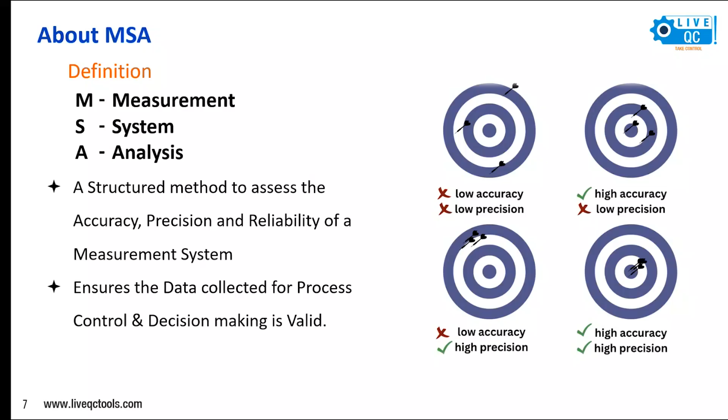MSA. As we all know, it is for accuracy, precision, and reliability of the measurement system regardless of the area of deployment. Now, let us focus on its core purpose, which is dealing with measurement errors, data variation both in process and system, then improving data-driven decisions and quality standards assurance.

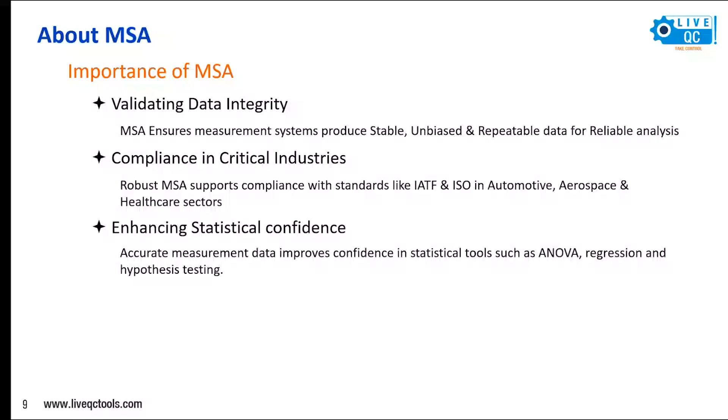It is important to recognize why MSA is so critical across industries, bringing the topmost importance in fields such as validating data integrity and forming a reliable foundation with trustworthy data. Robust MSA supports both audits and regulatory expectations, which also enhances statistical confidence, strengthens the effectiveness of statistical tools such as ANOVA and regression analysis, helping with continuous improvement in achieving long-term excellence.

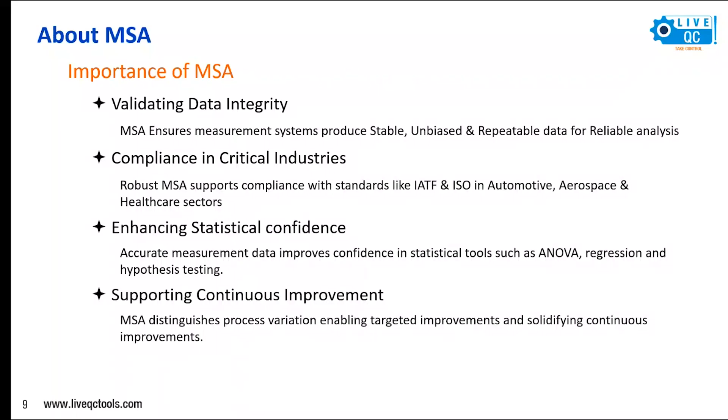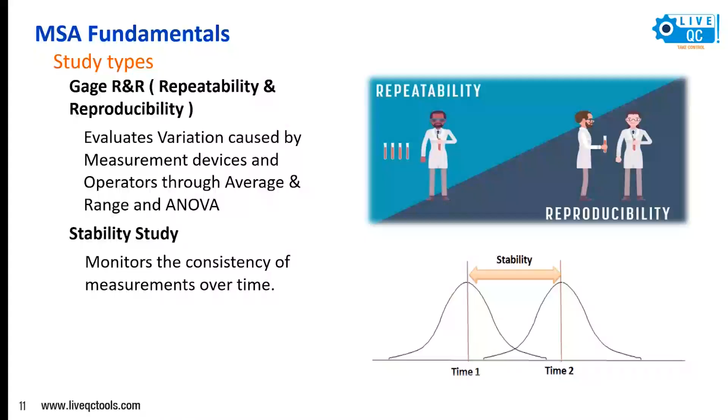Looking here, these are all the common study types, starting from gauge R&R, bias study, linearity study, stability study, and attribute agreement analysis. Let us take a closer look at two critical study types, gauge R&R and stability study. This study is typically performed using average and range methods or ANOVA-based approaches, both of which provide insight into repeatability, reproducibility, and overall measurement system variation. Along with that, stability studies are conducted to monitor the consistency of measurement performance over time.

Followed by that, let's focus on the accuracy related and attribute based studies. This study is bias, in determining whether a system consistently estimates the actual value. Linearity study extends this concept by monitoring bias across the entire operating range of measurements. Attribute agreement analysis is used to evaluate the consistency and accuracy of categorical decisions made by multiple appraisers.

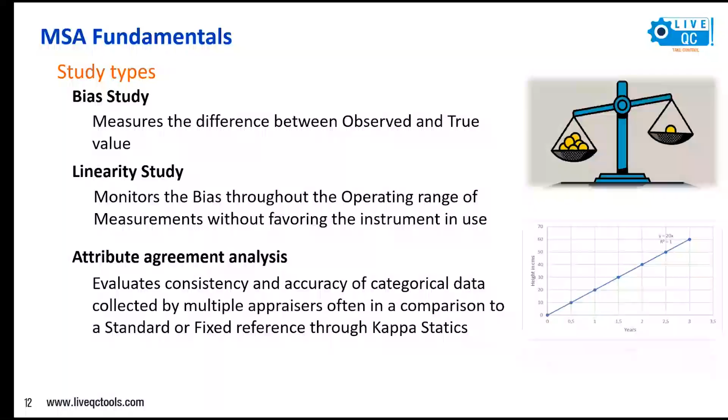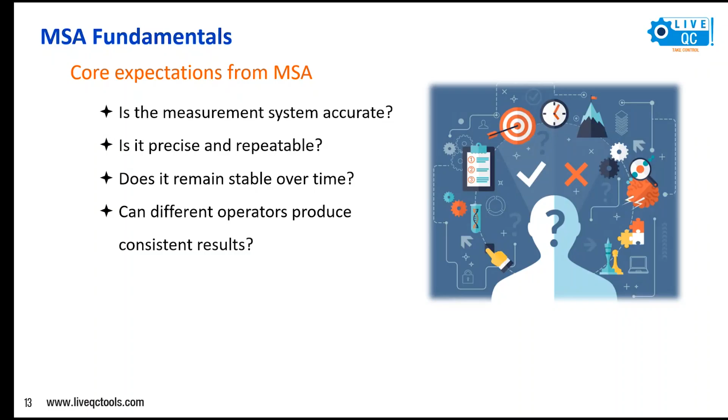The real significance of MSA lies not in the studies themselves, but in the questions they help us answer about our systems. At its core, it answers the accuracy of systems, precision of data, stability over time, and consistency of data. Now, let us see some of the key benefits, starting from reduction in variation, reliability in data, risk mitigation, sustenance of audit standards, cost reduction with increased quality outcomes.

The core deployment areas of MSA, such as the incoming material inspection, where MSA assures the vendors with the quality of product supplied and its compliance of standards. The wide application of process quality control and exit inspection by MSA is to monitor critical dimensions and tolerances like shafts, bearings, and any other in-house materials that are produced. In laboratory testing, MSA validates the precision of equipment used.

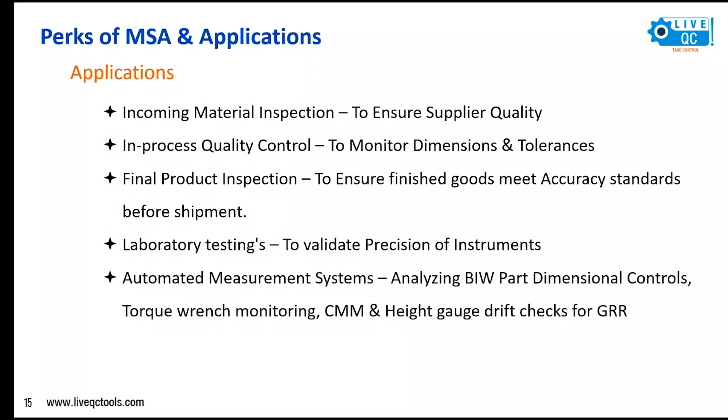MSA plays a critical role in automated measurement systems like drift checks, CMM operations, Poka-yoke data captures, torque wrench monitoring, including gauge R&R evaluations. Having seen how MSA is applied across incoming, in-process, final inspection, and automated measurement systems, let us now dive deeper into one specific application, the use of height gauges in automated measurement environments.

Just imagine a production line measuring a critical component dimension with a tolerance of plus or minus 0.05 mm. The height gauge is used during in-process inspection to ensure the dimension stays within limits. At first glance, measurements appear acceptable, but variation starts to show up in downstream inspection. This is where we break the problem down using ANOVA-based gauge R&R.

The first aspect is the operational aspect, the act of measuring the component using the height gauge. If the measurement itself is inconsistent, then the impact is immediate. Parts may pass inspection on one shift and fail on another. This directly affects product quality, customer satisfaction, scrap rates, and downstream process performance.

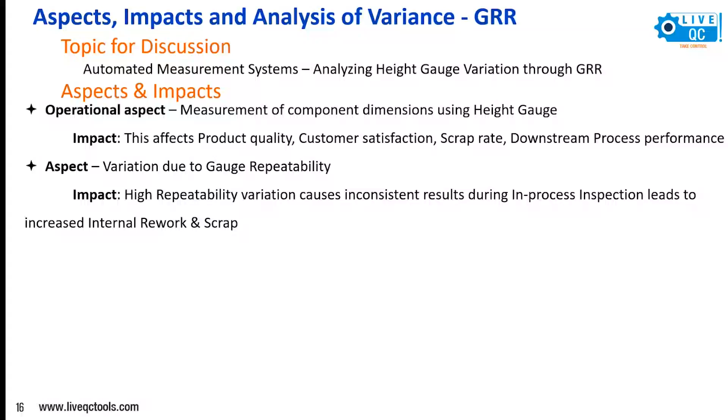ANOVA then reveals repeatability variation, variation coming from the gauge itself. For example, the same operator measures the same part 3 times and gets 10.02 mm, 10.04 mm, and 10.01 mm. The inconsistency leads to unstable in-process inspection response, increasing internal rework and scrap.

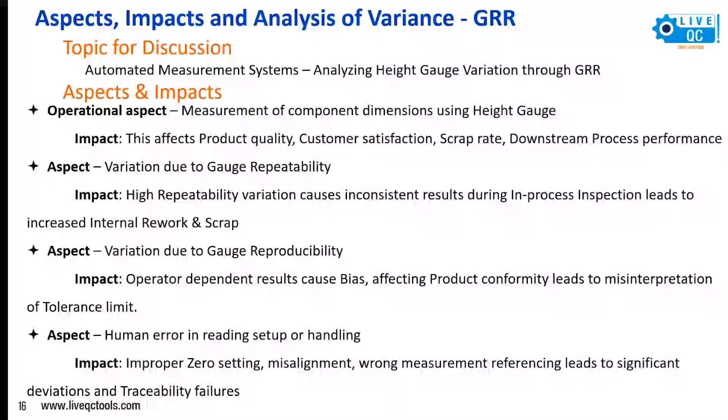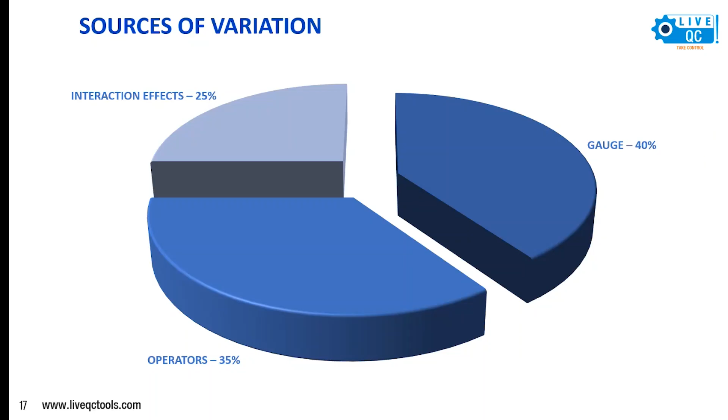Using an ANOVA-based gauge R&R analysis, we can quantify these sources of variation. For instance, 40% from the gauge, 35% from the operators, and 25% from interaction effects, clearly identifying where corrective actions are required. This level of quantitative insight allows organizations to move from observation to targeted data-driven improvements, which naturally leads us to structured problem-solving approaches.

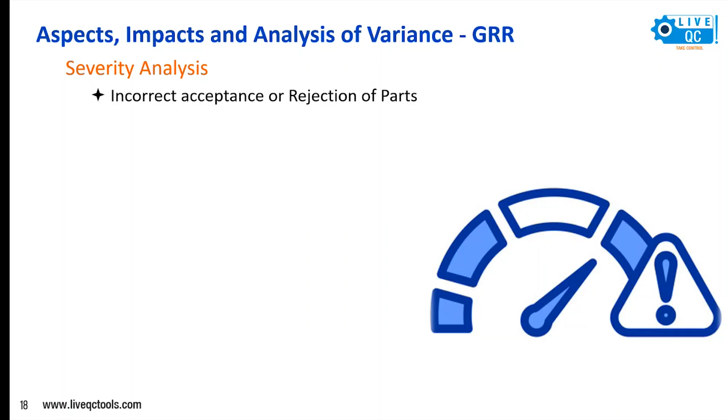Now, let's look at what happens when measurement system issues are not addressed. Imagine a critical component measured close to the upper tolerance limit due to measurement variation. A good part is incorrectly rejected, increasing scrap. At the same time, a borderline bad part is incorrectly accepted, silently moving forward in the process. This measurement error doesn't stop there.

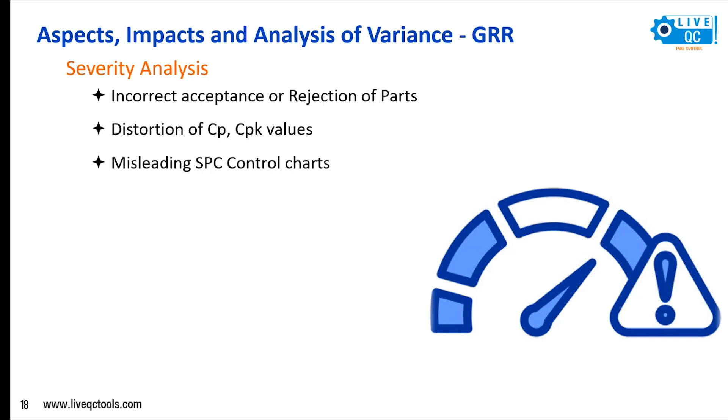When we calculate Cp and Cpk, the variation from the measurement system inflates the numbers, making the process appear either more capable or less capable than it truly is. Decisions based on these distorted values lead to wrong conclusions. The same error flows into SPC control charts, where false alarms or missed signals occur.

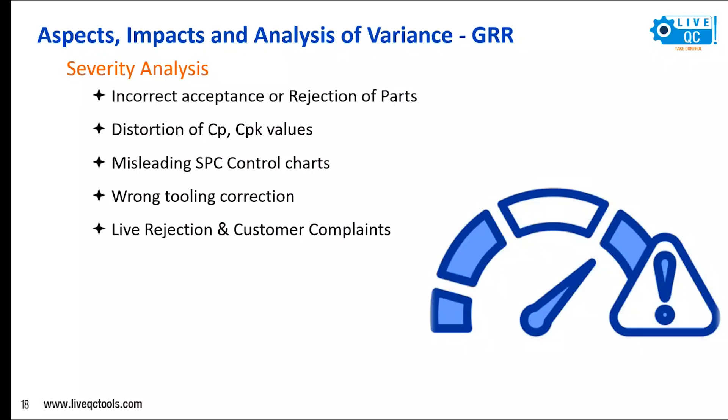Operators may adjust a stable process or, worse, ignore a real shift. Based on this misleading data, teams perform incorrect tooling corrections, chasing a problem that does not actually exist. Ultimately, these issues can escalate into line rejections, customer complaints, and loss of trust, impacting both quality performance and business reputation. Let's now look at how teams arrive at a reliable solution when evaluating height gauge measurement systems.

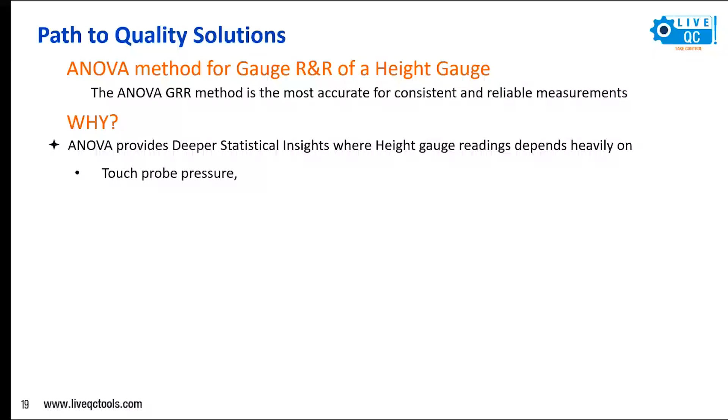Consider a scenario where multiple operators measure the same component using a height gauge. Even though the gauge is calibrated, the result shows unexpected variation. At this point, a basic gauge R&R method provides limited insight. It tells us there is a variation, but not why it exists. This is where the ANOVA-based gauge R&R method becomes essential.

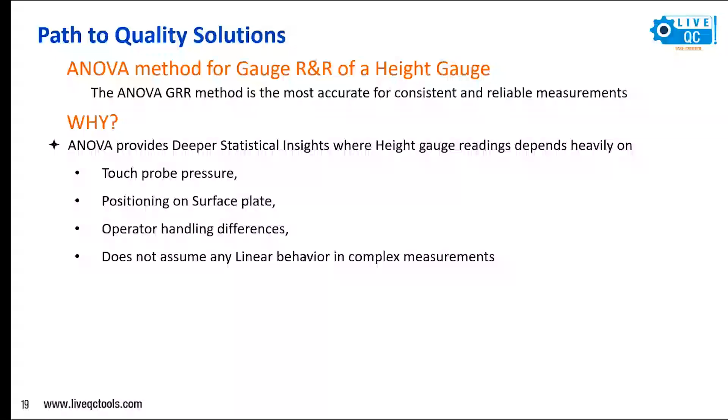Height gauge measurements are influenced by factors such as probe contact pressure, positioning on the surface plate, and operator handling differences. These influences are not always linear and cannot be accurately separated using simpler methods. Now, ANOVA helps us to statistically isolate and quantify variation from the gauge, the operator, and their interaction without assuming a linear behavior.

Because height gauges are highly sensitive instruments, even small differences in handling can significantly impact the results. ANOVA detects these effects clearly, enabling teams to focus on the true sources of variation. As a result, decisions are no longer based on assumptions, but on measured evidence, making ANOVA gauge R&R the preferred method for height gauge studies.

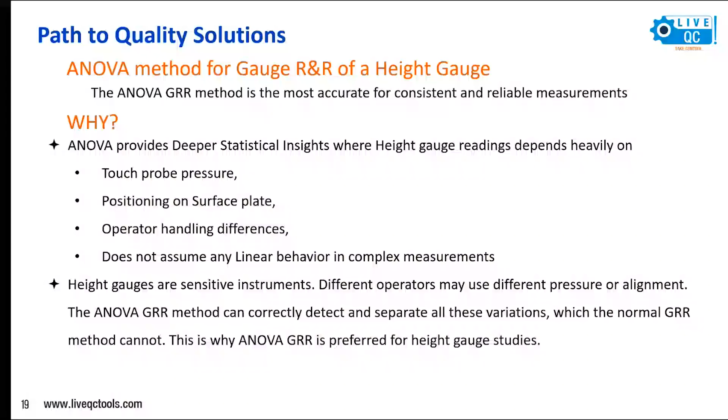Now let me walk you through a realistic scenario from the shop floor to illustrate why height gauge R&R results sometimes fail to meet expectations. Imagine a team performing a gauge R&R study on a critical component using a height gauge. On paper, everything looks correct. Trained operators, calibrated equipment, and defined procedures. Yet the GRR results come back higher than expected.

When the team looks closer, the first issue they notice is the surface finish variation. Some parts have minor burrs or uneven finishes. Each time the probe touches the surface, it seats slightly differently, causing readings to fluctuate by 0.02 or 0.03 mm even for the same operator.

Next, they observe parallax errors on the manual gauge. One operator reads 50 mm while another reads 50.02 mm on the same part, simply because their angle of viewing is different. Individually, these differences seem small, but statistically they add up.

As the study continues, operator handling differences become apparent. One operator applies more probe pressure, while another aligns the part differently on the surface plate. This shows up clearly as reproducibility variation, not because the operators are careless, but because the method is not fully standardized.

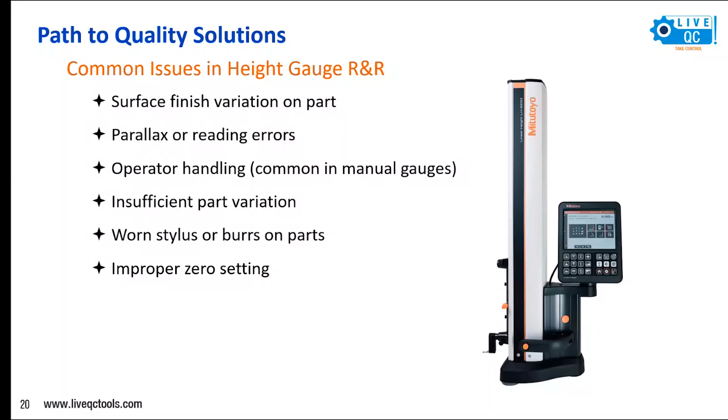In this demonstration, you will see how LiveQC guides the user through a structured and standardized workflow, minimizing manual effort and interpretation errors. The process begins by defining the study parameters. Here, we specify the measurement type as variable data, select ANOVA gauge R&R, and identify the measuring instrument, in this case a height gauge. We then define the number of parts, operators, and trials, ensuring sufficient part variation to represent the process accurately.

As shown here, LiveQC captures measurement data in a structured and traceable format, recording operator details, timestamps, and instrument references, which ensures consistency and audit readiness. Once data collection is complete, LiveQC automatically performs the ANOVA-based analysis, separating variation into repeatability, reproducibility, operator effects, part-to-part variation, and even interaction effects, without assuming a linear behavior.

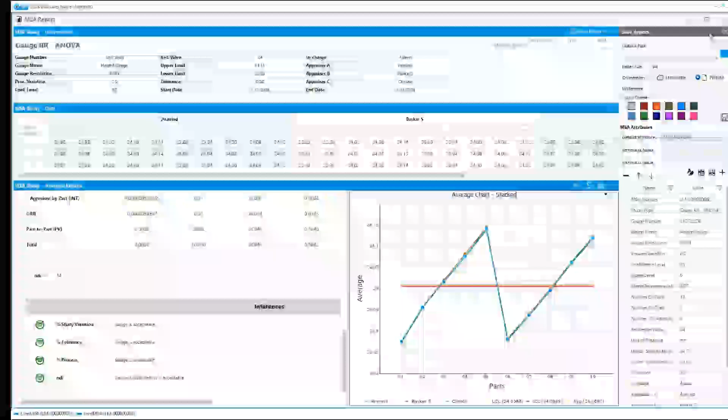The results are displayed clearly, showing percentage GRR and variation contributions, and LiveQC highlights whether the measurement system is acceptable, marginal, or unacceptable based on industry-accepted thresholds. This allows us to quickly identify whether the dominant source of variation is the gauge, the operator, or their interaction.

Finally, LiveQC generates the standardized gauge R&R report, including charts and conclusions. These reports are ready for audits, customer reviews, and internal quality documentation, eliminating the need for manual report preparation. This demonstration shows how LiveQC not only simplifies the execution of ANOVA gauge R&R studies, but also ensures consistency, traceability, and reliability in measurement system analysis.

Along with the ANOVA gauge R&R demonstration, you will now see workflow videos for bias and stability studies, which follow a similar structured approach in LiveQC. In the bias study, LiveQC compares observed measurements against a known reference value to quantify systematic error. This workflow ensures consistent data capture, automatic bias calculation, and clear acceptance criteria, helping to determine whether the measurement system consistently over or under measures.